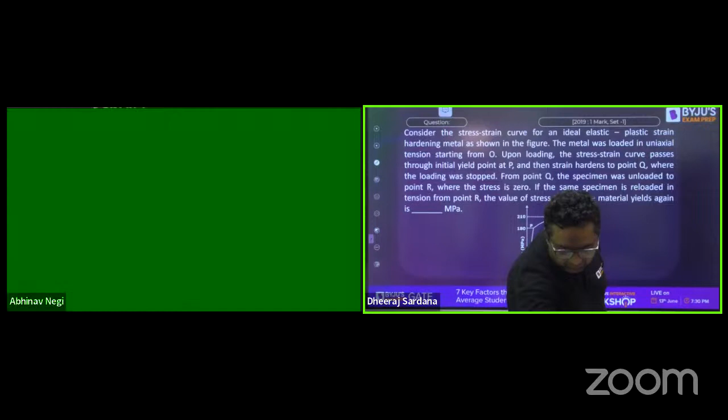Yes guys, so this is the very first question. Consider the stress strain curve for an ideal elastic plastic strain hardening metal as shown in the figure. The metal was loaded in uniaxial tension starting from O. Upon loading, the stress strain curve passes through initial yield point P and then strain hardens till Q, where the loading was stopped. From point Q, the specimen was unloaded to point R, where the stress is 0. If the same specimen is reloaded again in tension, what is the value of stress at which the material will yield again? Please tell me what is the right answer for that.

So here we have loaded the material, then we have unloaded the material. If we are going to once again load the material, what do you think will happen? Will you get the yield strength equal to 180, equal to 210, or somewhere lying between this? Vineet is saying 210. Very good, Vineet. What about others? I want an answer from all of you guys. If you don't have an idea, just give your opinion at least so I can tell you the mistake. Swapnil, Arun, Emmanuel, please tell me what would be the answer. Surya is saying 210. Very good, very good.

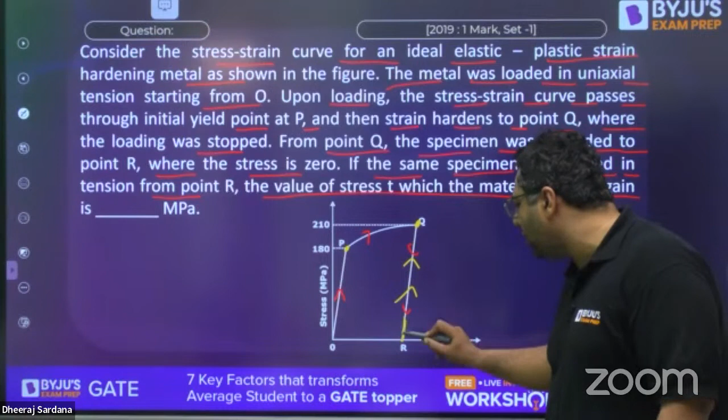So guys, I would like to tell you that whenever we unload and once again load, because of strain hardening, the resistance of the material increases. That is why when you load the material again, the new yield strength will be 210. A similar question in civil engineering we did just 2 days back, about what kind of property changes happen during strain hardening. There we studied that yield strength increases. So now yield strength is not 180 but will become 210, and that practice is majorly done in metal forming. I have taken this question because similar questions have come in exams like ISRO and BARC. So the answer for this is 210. I feel you got it.

Now this is a question where everybody can answer, both mechanical and civil, every student. Harshit, very good. So this question says: a solid cube of side 1 meter is kept at room temperature of 32 degrees Celsius. The coefficient of linear thermal expansion of the cube material is given, and the bulk modulus is given. The cube is constrained all around and heated uniformly to this temperature. Then the magnitude of volumetric stress induced due to heating is to be found. You need to find out the stress.

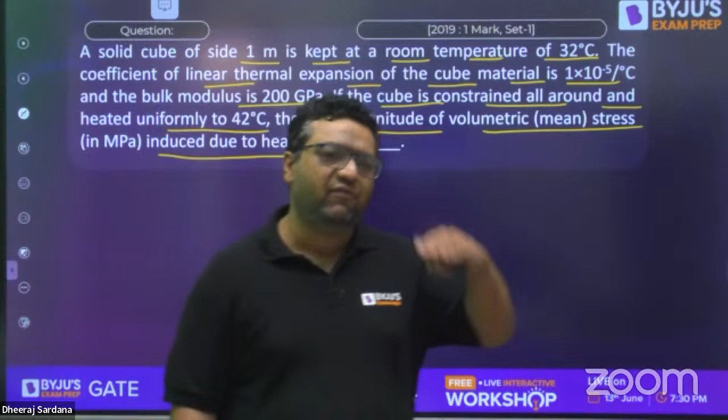No issues, Arun, that's why I already told you. Like you've seen when sir was taking the class, sir also said shear stress problems are not much coming for mechanical, shear flow problems are not coming much for mechanical. Likewise, stress strain diagrams are coming less for civil. So 1 to 2 topics differ, the rest 95% is the same.

Okay, very good Vineet, you have given the right idea, but solve it. So we are having a solid cube like this, and as you know, the temperature is being increased from room temperature of 32 degrees Celsius, with the coefficient of linear thermal expansion alpha mentioned. They are saying the cube is constrained all around, so it develops a volumetric stress sigma. Why volumetric? Because they are all equal - it's similar to a hydrostatic state of stress, sigma compressive. The temperature is increased by 10 degrees Celsius. So the volumetric strain that can come is 3 alpha delta T, and that will be stopped by these sigmas. That will equal 1 minus 2 mu upon E into sigma xx plus sigma yy plus sigma zz, which gives you 3 sigma. So here you just need to find the value of sigma.

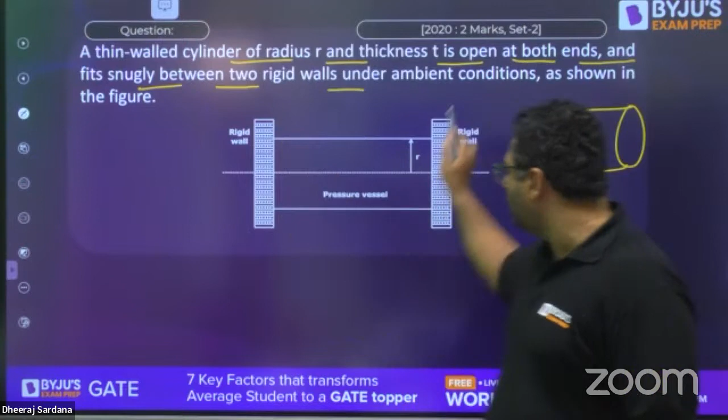Wonderful, so moving further to the next question, guys. This is from thin cylinder. A thin walled cylinder of radius R and thickness T, open at both ends, fits snugly between two rigid walls. So initially the cylinder was open, but then it is surrounded by the rigid walls. Rigid walls are kept, so now both the ends become closed. But as you know, these are rigid walls, they are not going to move further. So you can say ambient condition as shown in the figure. So these are the things mentioned.

The material of the cylinder has Young's modulus E, Poisson ratio mu, coefficient of thermal expansion alpha. What is the minimum rise in the temperature of the cylinder, assuming uniform cylinder temperature with no buckling of the cylinder, required to prevent gas leakage if the cylinder has to store the gas at an internal pressure of P above the atmosphere? You need to find out the value of delta T, my dear.

You know that whenever we are talking about circumferential stress and circumferential strain, it is given as sigma C by E minus mu times sigma L upon E. Then you also know longitudinal strain is sigma L upon E minus mu times sigma C upon E. I am giving you the formula, and you know thermal strain is given by alpha delta T. So you need to use these formulas.

Let us see how many of you are going to give the right answer for this. You know that the longitudinal stresses are going to be 0 because they have already mentioned it is open from both the ends. Rigid walls are there, so they will not create any longitudinal stress, because if the cylinder were closed like this, then only longitudinal stresses would come because of these pressures. So rigid walls will not be creating any longitudinal stresses, so longitudinal stresses you can keep as 0.

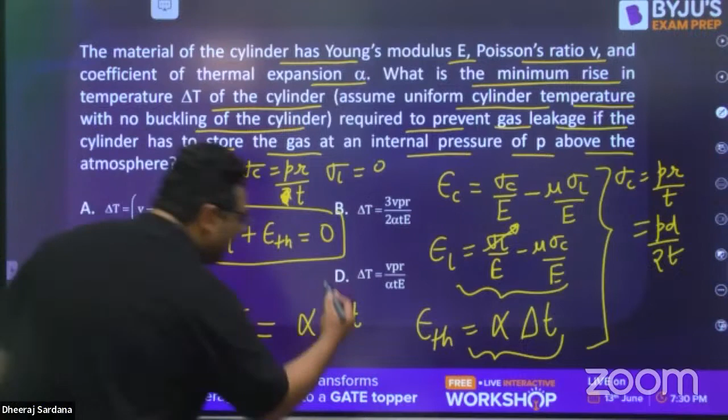So guys, you can feel it, the previous year's questions were not of that level. From last 5 years, a lot of change in the level of the question has been observed. So that is why this series was started. Abhinav sir said that we will be going for last 5 years because they are going to be very dynamic questions, okay, so that's why this idea was generated for you guys.

For that, I will show you one very small example. Let us say we are having this PYQ book of BYJU'S exam prep. So if I am having this body, I am going to apply the load like this. When I apply the load like this, and let us say I'm holding it for some time like this, and when I am going to unload it, after unloading, it is not going to stay there, neither is it coming back fully. It is coming somewhere in between. So whatever is recovered is elastic, whatever has permanent deformation is plastic.

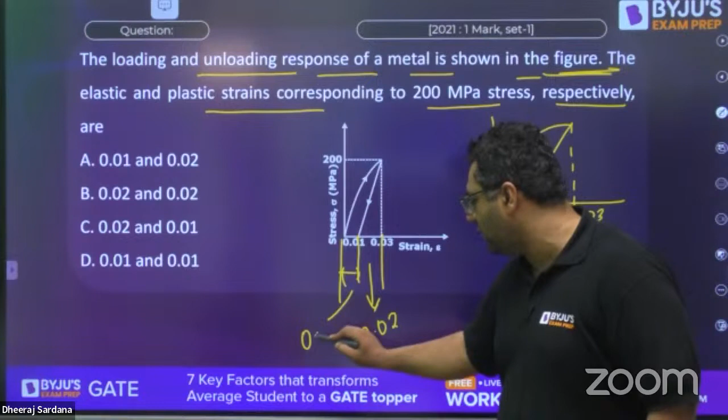Okay, already answered, answers are there. So the answer for this is, you can see this one part is elastic because it recovered 0.02, and this one is plastic because it was not recovered, 0.01. So the answer for this is going to be C.

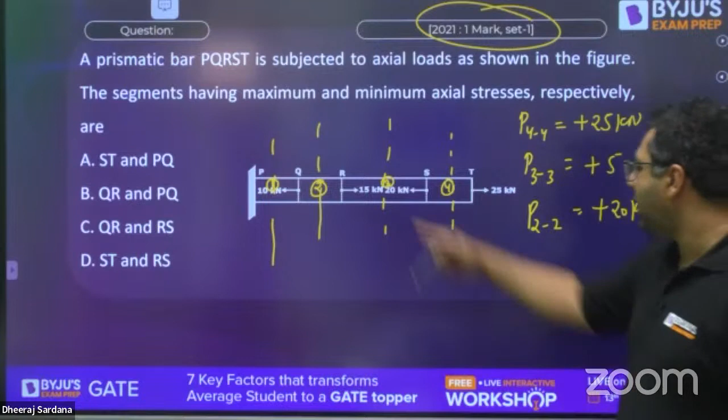So you can see next, minus 10 is added here, P1-1. I am finding out the algebraic sum of all the forces either to the left or to the right hand side of the section, okay. So when you find out, for this section to the right hand side, 25, 20, remains 5. 15 plus 5, 20 minus 10, 10.

So you can see these 4 members. You will find member 4 is having more load, and member 3 is having less load. So this one will be having the maximum stress, and this one will be having the minimum stress. So in that way, the answer is ST and RS, not ST and PQ. ST and RS, D will be the right answer.

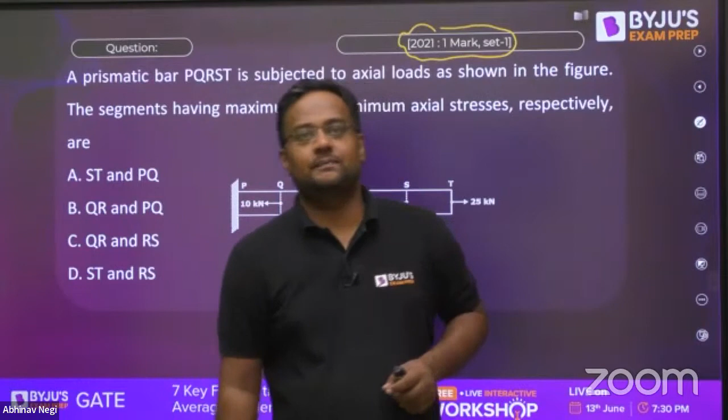Now let's move to the next question. This was asked for 2 marks and it deserves 2 marks. What is here? A right solid circular cone. What is a right solid circular cone? That is symmetric about the y-axis, like this. So this cone is not something like this, that is symmetric in the vertical direction. So this is the cone.

And in this cone, what is happening? Let us see here that height is h, base radius is r. This height is h, this base radius is r. And what is there? The cone is made of material with specific weight W. The unit weight gamma, we generally say that is W. Unit weight is equal to W.

What is given further? Let us see, oh, Suraj sir is also here, the champion, Suraj sir is also here. Welcome, Suraj sir. Okay everybody guys, please welcome, put a heart sign for Suraj sir.

Now modulus of elasticity is E, and deflection due to self weight is asked. Now, unless mentioned in SOM, we consider everything to be weightless. So here it is saying that weight is there, unit weight is given.

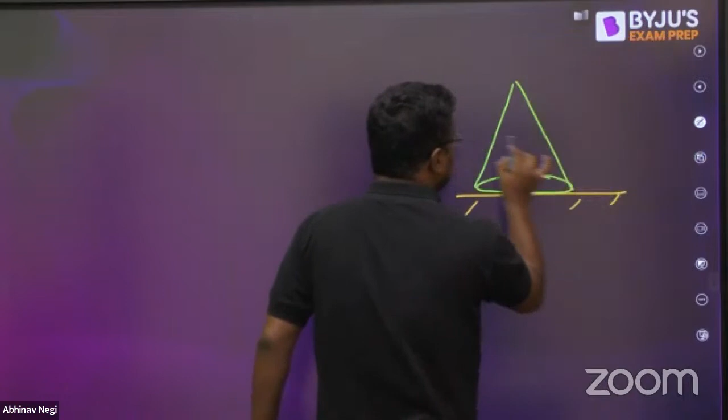Can you please tell me how this is possible? I am saying either see from top and bottom. So from yellow and red, how will it be same? Tell me, please. Let me tell you guys, suppose it is around mid height. This is yellow, and this is red.

So you will be saying red is more. Let me check if anybody has given comments. Mid mein hai isliye. Good morning.

Okay, now why is it the same? Suppose this yellow weight is 3 kg and this red weight is 5 kg. So what will be the reaction? You are not considering reaction 8. So at this section, if you are seeing from top, 3 is coming inside as compression. So from top it is 3 compression.

And at this section, this blue section, if you are seeing from bottom, 5 is going here and 8 is here. So from bottom also it is 3 compression. Give me a beautiful yes or no in the comment box.

I'm saying it is at mid, na, so both are not same. Yellow will be less weight, red will be more weight. So either way, from top and bottom, this is the concept. From top it is less and red is more. So you think like this.

No, from bottom also it will be same because 5 minus 8 is again 3. Give me yes or no in the comment box. Beautiful concept—not just beautiful, but students generally don't think this way.

Okay, now my challenge is still there. I will solve this again. I will ask if there's any doubt, most of you will say no, and then I'll ask a doubt from the steps. You will not be able to answer. I predict this, but if you are able to answer, I'll be more than happy to be wrong.

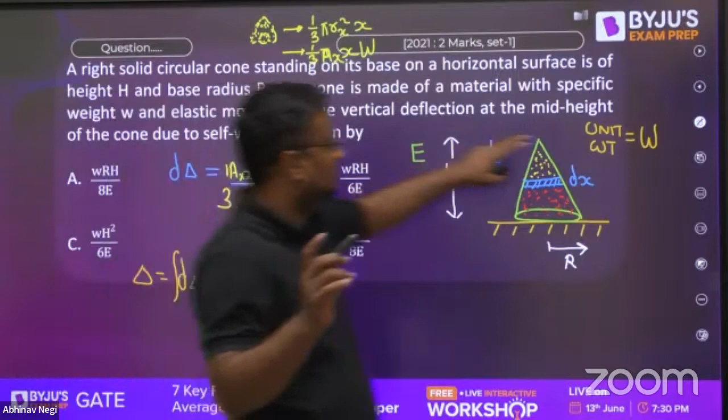Now we want the vertical deflection at mid height. The vertical deflection here at mid height is asked. So at mid height, delta will be the integration of d delta from h by 2 to h, the mid height. From h by 2 to h, it is equal to w by 3E, x square, but 2 is also taken common here, one by two x square. It will be h square minus h square by 4, which is 3h square by 4. So it will be 3 by 8.

3 by 8, please check—some calculation mistake has happened. It will be, no, 1 by 8. Okay, 3 cancels, it will be wh square by 8E. That is option number D.

Now my doubt—are you ready? Everybody please tell me in the comment box. Ready now for my doubt? First of all, give me yes or no. Have you understood this? Any doubt? Give me yes or no.

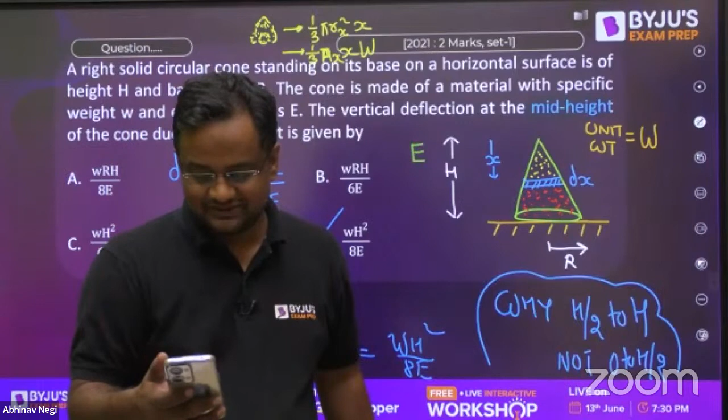So why have we taken from h by 2 to h, not 0 to h by 2? Why h by 2 to h, not 0 to h by 2? Arun, except Arun everybody, I want this because you have not asked it out. This is my doubt.

Now see guys, suppose this is a thing, and this is 0, this is h by 2, this is h. Now whatever is the deformation of this shaded region, is the deformation of this point. Let this be A, let this be B. So delta AB will be equal to delta B, because A is fixed.

Because delta A is 0, A will not be changing. So whatever is the change in AB, that entire change will be in the B portion.

But whatever change is in delta BC, we can't say it's delta B, because BC is also changing. Have you understood now? Whatever the change here, since this top bottom portion from h by 2 to h is not changing, whatever change happens will be reflected at the mid depth, h by 2. But the same cannot be done here, because here the mid depth is also changing, and this is also changing.

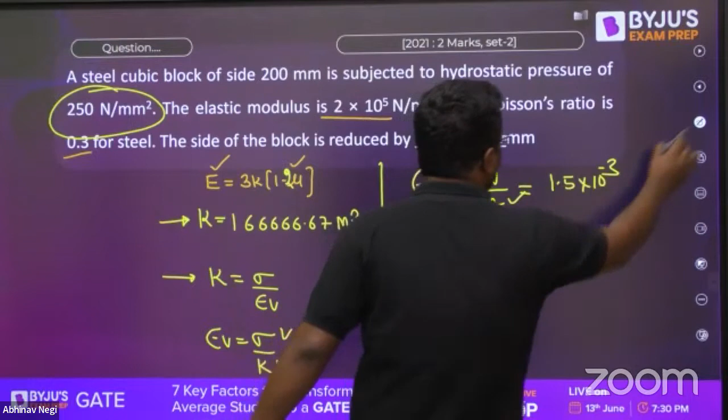Okay, volume is known, volume is known, 200 into 200 into 200. So from here, delta V can be found out because volume is known. So delta V is 12,000.

79,88,000 mm cube. So A will be the cube root of this, so side will be cube root of this. That comes out to be 199.899.

199.899, so they have asked for the change. The side of the block is reduced by, that is 200 minus this. Earlier it was 200, now it is this, so that will be 0.100 mm. That is the answer.

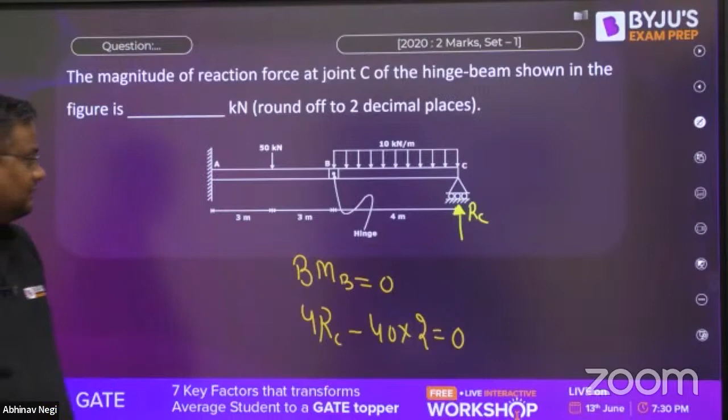Bending moment at B is equal to 0. From the right hand side, it is RC into 4, and one is this 10 into 4, 40 acting at 2. So 40 into 2 is equal to 0. So RC value, 80 by 4, will be equal to 20 kilonewton.

Okay, give me yes or no, any doubt? Now let's go to the bending stress. So in bending stress, what is the question?

Consider an elastic straight beam, and this was of length L is equal to 10 pi. So length is equal to 10 pi. Now this length is made into the form of a circle, bent into a circle. The cross section of this is a square of side 5 mm.

Cross section of this is a square of side 5 mm. Now it is bent in such a way that two ends meet, this end and this end, forming a circle. What is asked is the maximum stress, the maximum tensile bending stress.

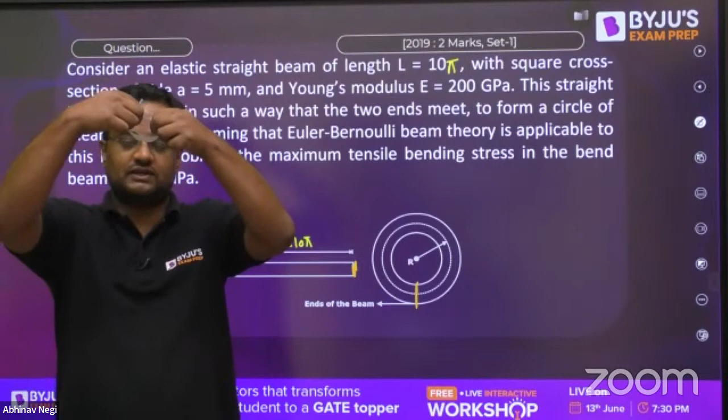Okay, so suppose this is a rectangular plate, length pi. This is bent in the form of a circle. Earlier it was a rectangle, like this, now what will be the radius?

So guys, now the circumference 2 pi r is equal to the length. Circumference is equal to length. So what is the value of r? So pi to pi, r is equal to 5 meter.

Here the moment is not given, so instead of using sigma by y is equal to m by I, we will be using E by R, because other terms are given. Now sigma is equal to E by R. Sigma max will be E by R into Y max.

Now tell me, is R value given? Yes sir, R is given. Is Young's modulus given? Yes, Young's modulus is given. What is Y max? From here, the neutral axis, Y max is equal to 2.5. All values are given, now you can do it in proper units. Y max is known, everything is known.

Y max is 2.5. This is 5 mm, na? Section of side is equal to 5 mm. Okay, so what is the answer coming? Can you please let me know, everybody? 100 megapascal? 100 megapascal, simple answer.

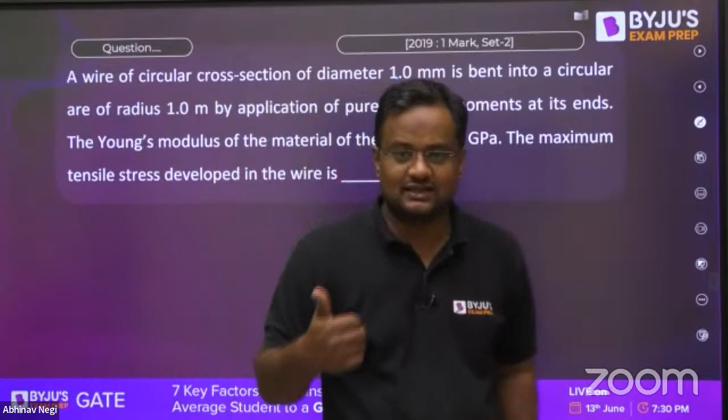Okay, so for the maximum tensile stress, again same concept, sigma by y is equal to m by I, so this is E into y max. E is known. What is the radius?

Radius is this, diameter is this. The red wire I showed you was like this, it has a diameter of 1 mm. So what is y max? Half of this, 0.5 mm. This red wire is bent in the form of a circle whose radius was 1 meter. Now putting y max value as 0.5, E and R are given. So what is the sigma max coming out to be? What is the maximum coming?

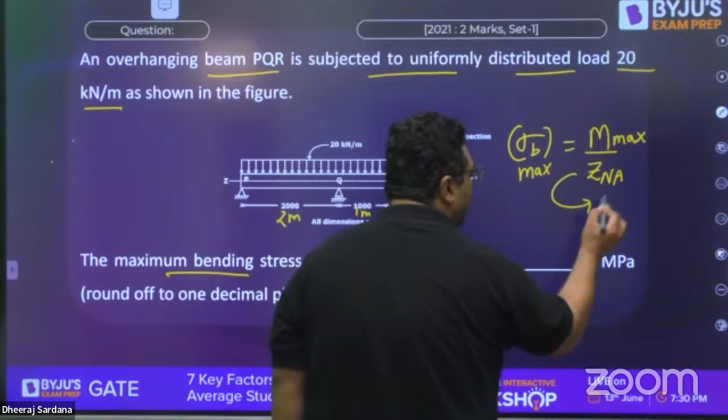I feel everybody is aware that the maximum bending stress is given by M upon Z at NA. But to find the maximum, we need to take the maximum bending moment into consideration. So first, for this given beam, our target is to find the maximum value of bending moment. Once we get that, we can find the bending stress, because Z is BD square by 6. So we just need to find the maximum bending moment for this loading.

So for that, first we take the support reactions here and here - let us say RP and RQ. For that we need to make the equations. First equilibrium equation is summation Fy equals 0, which gives us RP plus RQ equals 20 into 3, that is 60, taking it in kilonewton format. You also try as per the information given. I feel you would be aware how to do that - first you need to find the support reactions.

Then we go for summation moment at Q equals 0, because it is a hinge point, the moment about it is going to be 0. RP is creating a clockwise moment, so RP into 2. This complete UDL can be assumed to act at its centroid, and the centroid of the 3 meter span will be at 0.5 meter from here, creating an anti-clockwise moment. So this is going to be minus 20 into 3 meter distance, and it is at 0.5 from Q. Setting this to 0, you get RP, and putting that value you get RQ.

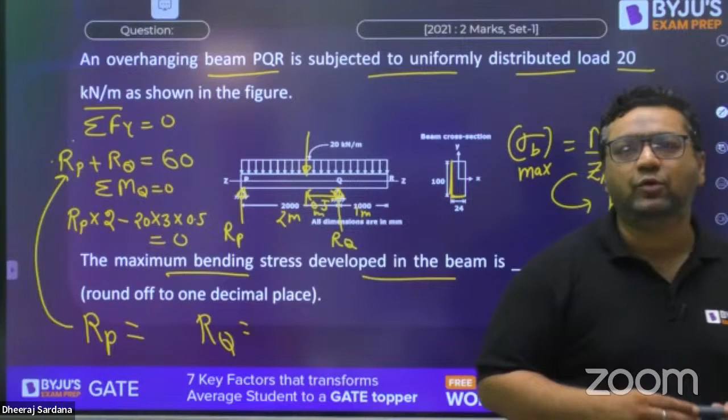Can you give me the value of RP and RQ, then I will go for the further solution? Anubhav, Vijay, Education Hub, Jitin, CAD, Arun, Sumit, Swapnil - wonderful. I feel aspirant is not there now. RP is coming out to be 15 kilonewton. RQ is going to be 45 kilonewton.

Yes, 15 and 45. Very good, all of you! So 15 kilonewton and 45 kilonewton are the values of RP and RQ. Very good, Surya, wonderful dear. When the total load's centroid comes nearer to Q, more reaction will come at Q, that is for sure. Now I am showing you this as RP, this as RQ, and this was the UDL.

This is the case. Now we need to find out the maximum bending moment. First, we will take a section XX at a distance of X. When writing the bending moment equation MXX, you will write RP into X creating clockwise to the left hand side, and UDL will create anti-clockwise, so minus W into X into X by 2. W into X is load, X by 2 is the centroid distance.

So RP value you have calculated as 15, so it is 15X. Minus W, which is 20, into X square by 2. The 2 will cancel out, and you will get the equation to be 15X minus 10X square. Now if you want to find out where the bending moment is going to be maximum, take x from here.

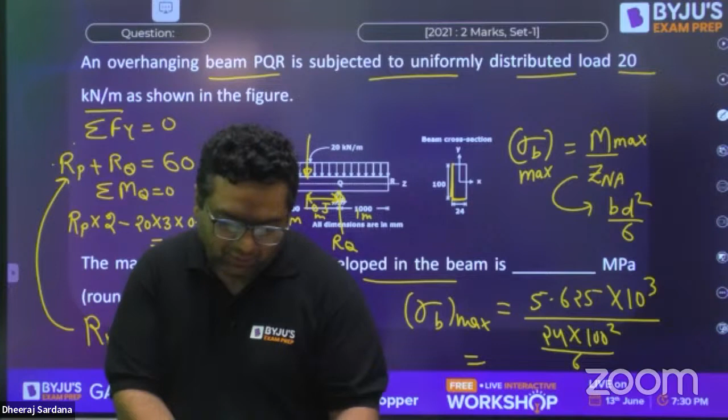I feel you guys are enjoying the session the way sir was explaining the cone problem. You will not get that kind of solution, that kind of explanation at any other place. The way of explanation will give you confidence for similar questions as well. We are not only here to make you mug up the last 5 years' question solutions, but to prepare you for similar questions. That idea, once I had, I was very happy when sir said it too — yes, last 5 years' questions would be very beneficial for students. And so is your response, guys.

Wonderful. So the answer will be coming as 140.6 MPa. This is 10 to the power 3, coming into Newton per mm square.

140.6, are we getting? Yes, okay, 0.14 we are getting. 0.14, I have not calculated that, I calculated only till this point. I thought after that we can do it. So it is 5625 into this, divided by this. So I feel yes, 0.140 would be coming. But it's fine, I feel you can do that much. That's great, moving to the next question guys.

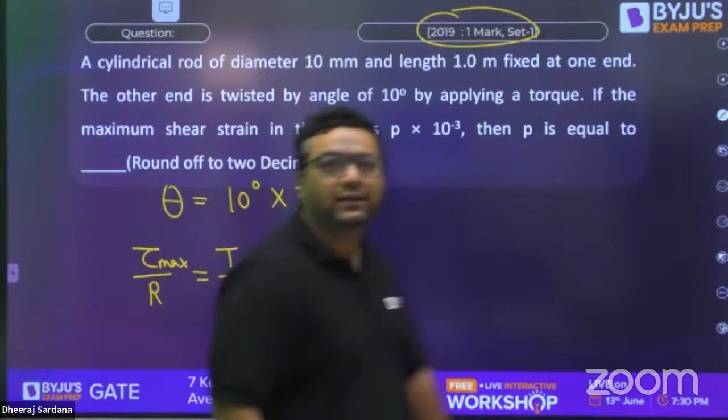Okay, sorry, yes, that was the mistake actually. It will come out to be 10 to the power 6 because it is Newton meter. So we have converted into Newton mm. Very good, Anubhav, you have found out the mistake I have done. It is 10 to the power 6 because Newton meter was the unit. So I converted first kilonewton into Newton, then meter into mm. So when you go for these two transitions, 10 to the power 6 will come, and then this answer is correct.

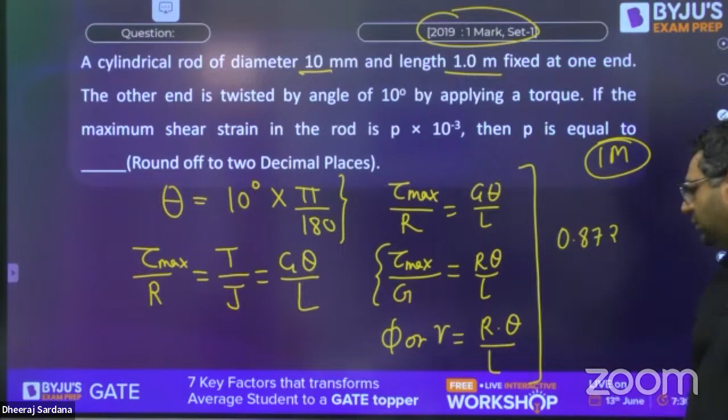Yes, Arun, Vijaya, Anubhav. Okay, Surya has given the answer 0.87, that is correct. 0.872 is correct, because when you equate it with P into 10 to the power minus 3, P will come out to be this. Surya, very good dear, you are doing very nicely. Wonderful. Anubhav, Arun, everyone.

Have you done it guys? Please tell me that. Very good, Swapnil. Wonderful, Swapnil. Very good. Moving to the next question, guys.

Now we are entering into the deflection part, deflection of beams. Deflection of beams is coming more for civil people. For civil, 1 to 2 questions are compulsorily coming from that topic. But from mechanical, either SFD-BMD or deflection, 1 question is coming from both. So in mechanical, equal weightage is given to all topics: simple stresses 1 question, bending torsion 1 question, SFD-BMD deflection 1 question, strain energy 1 question, thin pressure vessel column 1 question. So equal weightage is there and more weightage is there. 8 to 10 marks is coming for SOM.

So a cantilever beam having a square cross section of side A is subjected to an end load. If A is increased by 19%, the tip deflection decreases approximately by how much. You already know if we have a cantilever beam like this, and we apply a load P like this, the deflection coming out to be PL cube upon 3EI. So deflection is directly proportional to 1 upon I, and I will be nothing but A to the power 4 by 12. So that is the case. So you are told that 19% is the increase of A, then by how much percent will deflection get reduced?

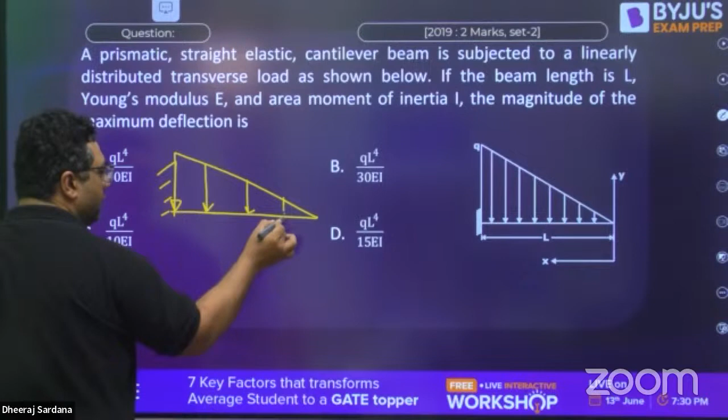So my dear, what you need to do, you need to find out the magnitude of maximum deflection. I feel everybody would be remembering this because in the table, we remember the result. For this case, if you will be finding out the deflection at A, you will be getting minus WL4 upon what? Everybody remember that. Very good, Surya, 30 EI. And when you will find out the theta A for that, it will be WL cube upon 24 EI.

Don't worry, I am going to show you the solution as well if you want. Don't worry for that. So we are having this. Everybody remember that we always remember this table so that we can very easily do that. So if this is A, this is B, you are going to write down equation at section XX.

So you write the equation at section XX as EI d square y by dx square is equals to Mxx. Mxx is nothing but, you can see, this is the section, triangle is the load. So we can assume the area of triangle acting at centroid. So if this distance is x, we will be having Wx by L acting at x by 3. Everybody know that? Because if you take this triangle, total load is W here, maximum, so here will be Wx by L.

So you can write it as moment is this into this. So this is going to create hogging, minus Wx by L half into x. This is the area acting at centroid x by 3. So when you will be going for the integration once, you will get dy by dx EI. First integration, you will go for minus 1 by 6 Wx cube by L dx.

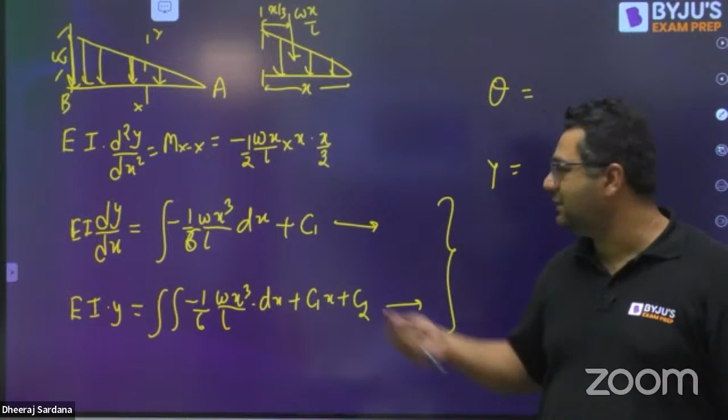If anybody wants, I will go for the complete solution. Otherwise, I know you have remembered the table. So if they ask you about UDL in a similar way, you would remember the deflection formula.

So now this question, which I was saying was asked in civil and XE many times, came for the first time in mechanical in 2019. Likewise, I can show you many questions repeated from XE and mechanical in civil as well. So sir, am I right?

Bilkul sir, you are always right. So this question, sir, you have done, na? Okay, now I will be doing this one, guys. Let us draw the free body diagram now.

Whenever spring questions come, you have to do this almost every time. This P load wants to push this beam downward like this, but the spring will provide the upward reaction. Let the upward reaction be R, and if the upward reaction is R, then the spring will have the R reaction downward. I already told you yesterday what I follow to make the free body diagram.

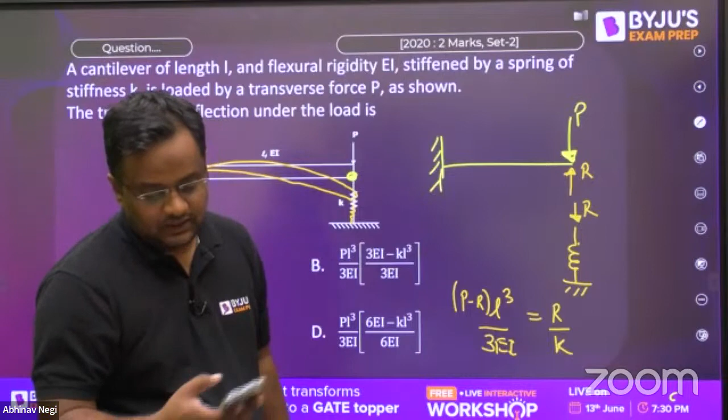And deflection of this point is R by K. Both will be same, both will be same. From here, you can find out the value of R in terms of P.

Now let me check how much it came when we found R in terms of P. This is coming to be R into (1 by K plus L cube by 3EI) is equal to P L cube.

Okay guys, whatever value R comes to, leave that, you can do it from here. Then deflection will be, whether you put it here or here, anywhere, deflection will be R by K. Either way you put it, both are equal, it will be same. So from here, you will get option C. Have you understood the concept?

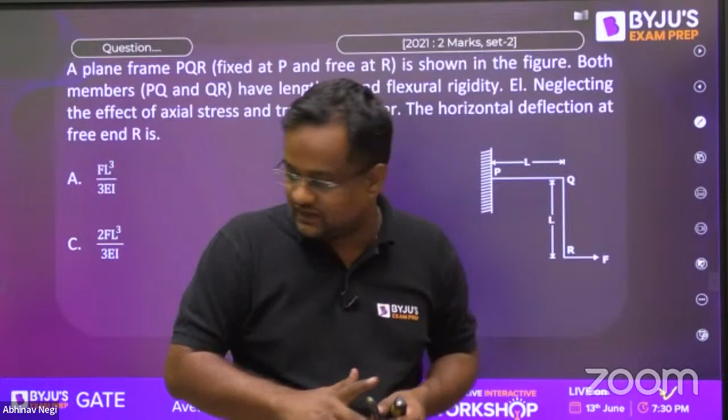I only know how to make a free body diagram. This is the orange and this is the yellow. Now here the F force is coming. Let this F force be Pn.

Okay, so here is how much? Pn for balancing. And what is the moment? This length is L, so it is applying Pn into L here.

Internal force is always equal in magnitude, opposite in direction, so that Pn will go here, Pn, and here Pn clockwise. So here, this is rotating it clockwise. So here it is anti-clockwise.

So here this F value will be... no, this is anti-clockwise there. So here it is rotating it like this. So this is clockwise, so internal force equal and opposite. So this is here in this direction, so this will be opposite, this will be Pn into L like this.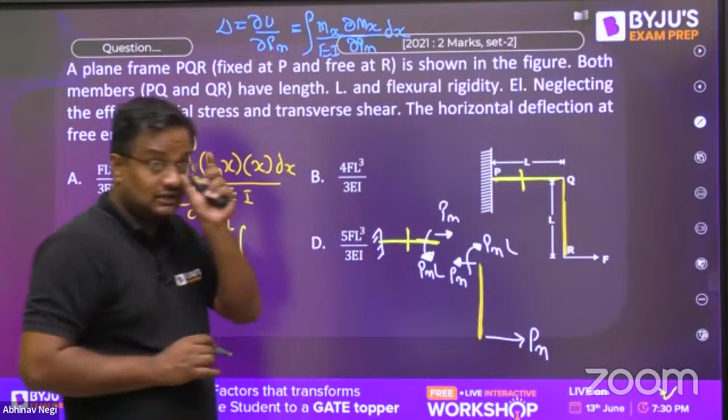Now for this yellow part, plus, this yellow part is again from 0 to L. At any section, what is the bending moment? This Pm is not applying any bending moment. The bending moment is due to Pm into L.

Whatever is written here, differentiate with respect to Pm: L dx upon EI. Now this step is done. We can write the original values, that is Pm is equal to F. So this is equal to, everybody please see here, Pm is equal to F. Now we can put the original values.

This is F, this is F by EI, and this will be x square by 2. So put 2 here. X square integration will be L square. So FL square by 2EI, this orange term.

Now for the yellow term, this is Pm is equal to FL square by EI, integration of dx from 0 to L will be L. So this will be FL cube.

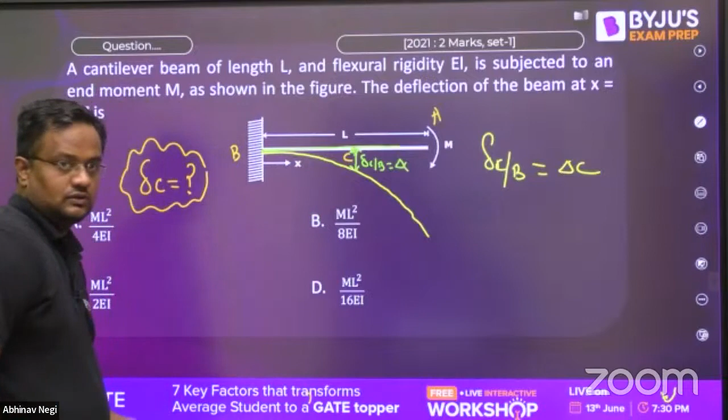Now here, deflection of C with respect to tangent at B is equal to delta C. It is actually the area of the M by EI diagram. So this is the M by EI diagram, the area of M by EI diagram between B and C about C. So what is the area? M by EI into L by 2.

The moment arm is L by 4 about C. Moment of area into distance, this is area, this is distance. So this will be ML square by 8EI.

Okay, again easy, again easy. So deflection question, civil might be finding easy here.

Now consider a linear rectangular thin sheet of metal subjected to uniform uniaxial stress of 100 megapascal. So guys, uniaxial means only in one direction. So this will be sigma 1 major. Shear stress is 0, nothing shear stress here. Uniaxial loading only, one direction, one loading, no shear. So what is sigma 2? 0. Simple. Now plane stress condition means sigma 3 you don't have to consider.

Young's modulus is given, Poisson ratio is given, the principal strain is asked. So everybody can tell this: epsilon 1 equals sigma 1 by E minus mu sigma 2 by E, with mu given and sigma 2 is 0 because it is unidirectional loading. Epsilon 2 is equal to sigma 2 by E minus mu sigma 1 by E. Everything is given, so the answer will be option D.

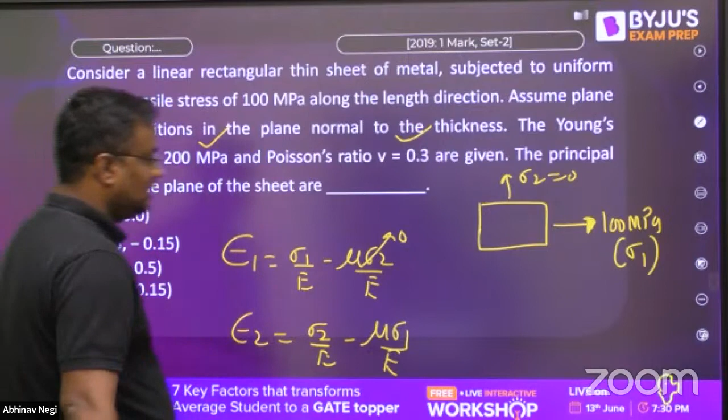It will be the D option. Getting it or not? Getting it or not?

Okay, now Dheeraj sir will be coming with his question and then I'll be coming again. So these questions we have done. This time in the second shift, it seems I went a bit fast, I feel.

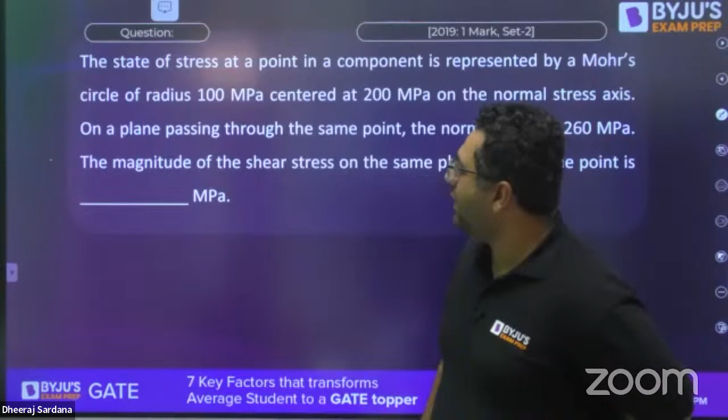So guys, now we have a question from transformation or principal stresses. The state of stress at a point in a component is represented by a Mohr circle of radius 100 MPa, centered at 200 MPa. So take the axis, let this be the center at 200 MPa, and you have a circle with 100 MPa radius. This is the Mohr circle. They say the normal stress on a plane passing through the same point is 260. So 260 would be somewhere here, because here it is 300. So we are talking about this point, so this distance is going to be 260. This was a new type of question asked for the first time in GATE 2019, for 1 mark.

And the magnitude of shear stress on the same plane, that's what they are asking. So for that, it's better if we make the radius. You already know the radius is 100. This is 100, and if this is 200, this is 60. Now everyone can apply Pythagoras to find this tau value. You can write 100 squared equals 60 squared plus tau squared. Very easy question, very very easy question.

Shri Ram, Meena, good afternoon dear. How are you? So Anubhav, Arun, Shri Ram, aspirant, solve it. Aspirant, where were you in between? In between you went, I feel. Okay, Anubhav is saying 80, Arun is saying 80, and I have already calculated the answer for you. The answer is 80, very good. Wonderful guys, very nice.

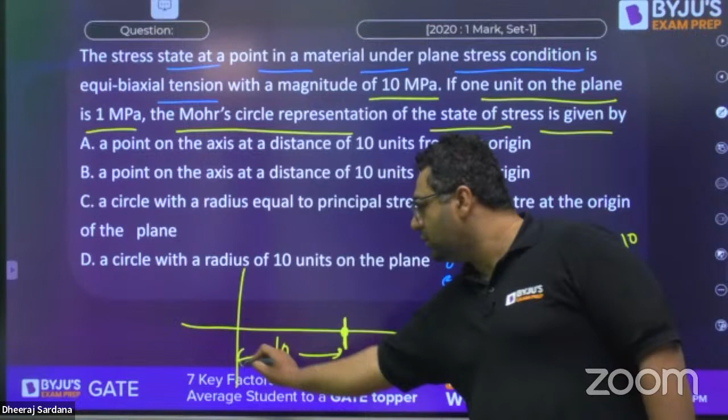When you talk about Mohr circle, this time it's going to be a point because X phase state of stress is sigma comma 0, and Y phase state of stress is sigma comma 0. They are the same points. So when you join them, you get a Mohr circle as a point at a distance of 10. Shear stress will be 0, all planes are principal planes. So the answer is going to be B.

B is the right answer. Anubhav is saying A is a point on the axis at a distance of 10 units from origin. Actually they have written the same, so that's why A and B are the same statement here. This is by misprint. I feel this should be 1 unit, then A is wrong. This was the misprinting - A was having 1 unit, B was having 10 units, that is the difference. C is saying radius equal to principal stress, not possible, and radius 10 units, not possible. That is how the thing works.

Yes Arun, so this is the problem, as sometimes typists also make mistakes. This was a dangerous question, if you see.

Consider 2 concentric circular cylinders of different materials M and N. You can see this is M, this is N. They both have center at C or O, let us say. Then they are saying they are in contact with each other at R equals B. So at this radius, this is the contact point of both cylinders. Then they say the interface at R equals B is frictionless, meaning at this surface there is no friction, and no friction means no relative motion.

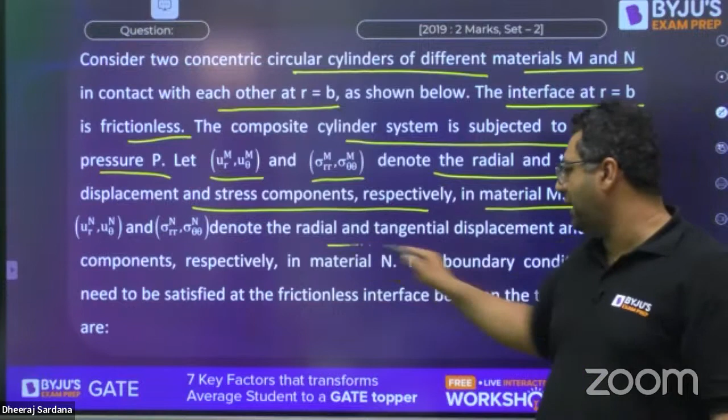Then they say the composite cylinder system is subjected to internal pressure P. UR, U theta, and sigma R, sigma theta denote the radial and tangential displacement and stress components in material M. Similarly for N, the boundary conditions that need to be satisfied at the frictionless interface.

This is a difficult or different type of question, I will say, and first time it was asked like that. But if you go for the solution, it's not very difficult - looking at the statement it seems difficult. First of all, this is frictionless, so there's no relative motion.

So you must say that the radial velocity of M and radial velocity of N will be equal. But when talking about circumferential velocity, for any cylinder surface, you know this is the radial direction and this is the circumferential direction. Whenever we talk about circumferential velocity, it is given as R into omega. So when talking about M and N cylinders, the radius will be different, so velocities will be different. That's why circumferential velocities will not be equal.

So circumferential velocities are not equal, but radial velocities are equal. For this case, if you see radial velocities given equal here, and circumferential given equal there, B is wrong. If you see radial and circumferential both given equal, A is wrong. So either C or D can be the answer.

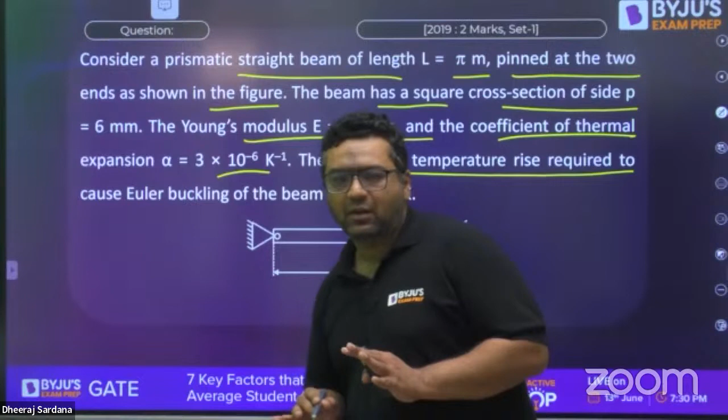I feel here two things are there. First of all, temperature is going to rise. When temperature rises, the beam will try to expand. At that time, a reaction will come, and as the reaction comes out to be compressive in nature, it will be a case of Euler's buckling.

Arun, that is of thick cylinder. Yes, thick only. I was showing you the direction because in thin cylinders, radial stresses are assumed to be zero. That is sure, it is thick.

So here, what we are going to do is say the force due to thermal. I feel everybody knows that this is A, E, alpha, T - this is the force due to thermal. And whenever we are talking about this force, buckling load is pi square EI upon Le square.

So this is going to be compressive, and this is going to be tensile because temperature increases. Now, the minimum temperature rise required to cause Euler's buckling - if the body is in equilibrium, both will be equal.

It's a very good question. For the first time they have included thermal stresses with the column. Otherwise, thermal stresses were included with beams only, bars only, shafts only. They have included it with columns also.

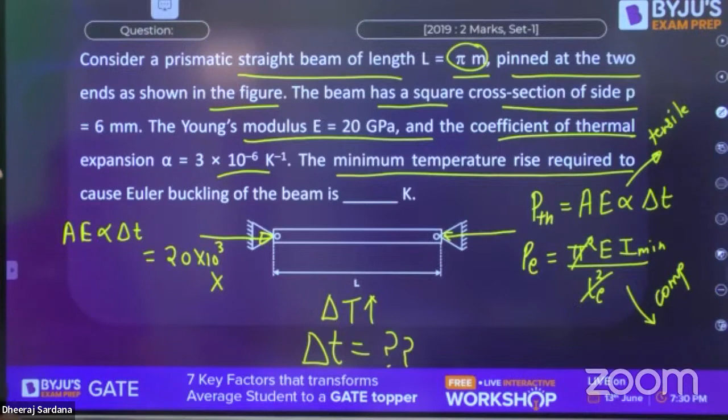I minimum, it is a square section of side 6 mm. So side P equals 6 mm, so I is 6 to the power 4 by 12. And you know that area is A square. Young's modulus will also get cancelled out, no need to put the value. This is 6 ka square. Alpha is also given as 3 into 10 to the power minus 6. So you will get delta T equals to...

Everyone, I don't feel that answer is correct, Anubhav. Please try it again, it is a very easy question. This is 6 ki power 4, this is 6 ki power 2, so it will be 36. So when you cancel out this 12, 3 will get cancelled out. I feel the answer will be coming out to be 1 Kelvin.

1 Kelvin is going to be the right answer. When we are talking about the values, this is going to be in mm square. So as everything is given in meters, you would be having 6 to the power 4, and this will be having into 10 to the power minus 6. Why? Because this is 6 to the power square, this is 6 to the power 4.

This is 6 to the power 4. So either you can put 10 to the power minus 12, 10 to the power minus 6 - they will also get cancelled out. So this will be cancelling by this. So the answer is 1 Kelvin.

Arun, got it, your mistake? Yes, definitely, because everything is in meter. You won't get the answer in Kelvin directly - this is only Kelvin inverse. So every other thing we have converted into meters. So it should be like that.

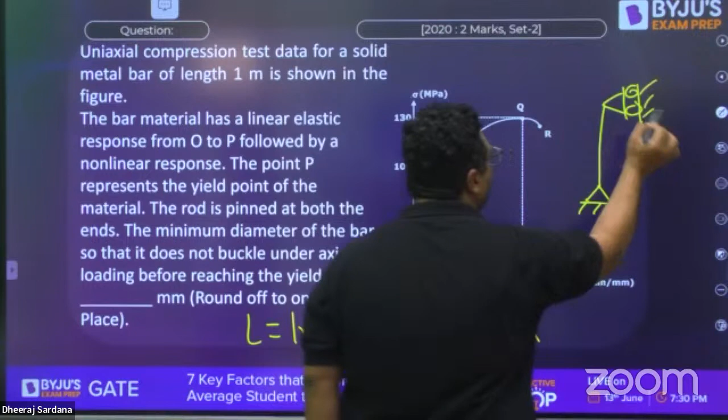Okay, that is mentioned. Now he's saying, the point P represents the yield point. The rod is pinned at both ends - that means it is a case of both end hinge column problem. Then he is saying that it does not buckle under axial loading before reaching the yield point. For that, you need to tell the minimum diameter, my dear. Yes, very good, guys.

So you are going to apply the force, and he is saying that buckling should not happen. For that, what should be the diameter? You just need to know that buckling load is pi square EI upon L square. If you do PE by area and equate it with SYT, I feel you will get the answer of diameter. So just do this.

This is a very easy question. From the figure it looks very difficult, and from the statement you may feel it's tough, but if you see, it is very simple. You just need to equate load by area equal to stress, and you will be getting the diameter. This is the question, so guys just solve it.

Now we have done a lot of questions. Very few questions are left for our side. Yes, solve it. I have already done it for you. Let us see how many of you give the right answer.

So PE by A is SYT. PE ka formula is there in front of you, and we need the value of diameter. Very easy question. Everybody try it.

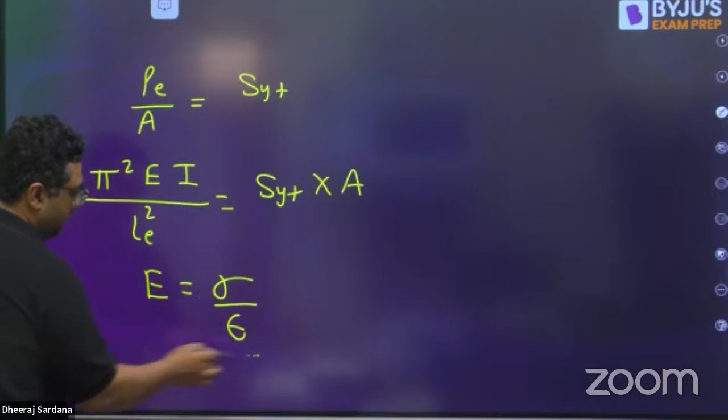So when we are solving this, according to my data, the answer is coming out to be D minimum as 56.94 mm. Are we getting that? Swapnil, Arun, Anubhav, please tell me that. Yes, 56.94, that is the correct answer.

If you want, I am telling you how to find out Young's modulus. Young's modulus is the slope, you can find out. This is the hint I feel you are looking for.

Anubhav, the answer will be coming 56.94. I feel you have made a small mistake because you are getting half of that. So this is the stress, this is the strain. This will give you Young's modulus as 100 divided by 0.002. Stress by strain is Young's modulus. Everyone got it or not?

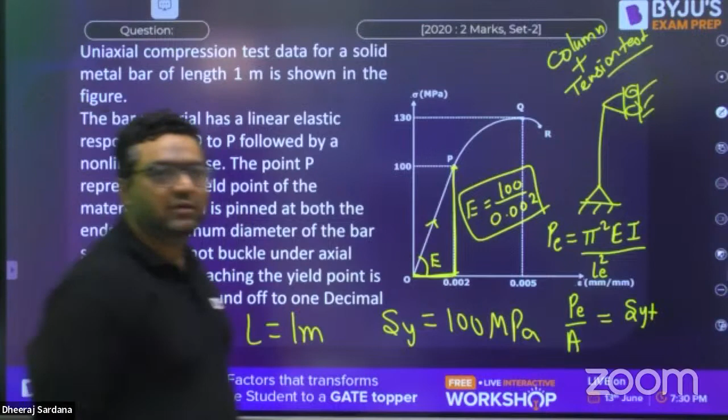Shall we move on now? This is simple calculation, I feel you can do this. Okay, next question. Yes, Abhinav sir would be taking the next question. Please tell me, is it clear for you? Tell me. Yes, sir.

Okay, till sir joins us, let us solve one or two more questions. Let us see this question. Okay, let us see how many of you give the right answer for this.

Okay, sir is coming. I was on mute, that's why. Okay sir, then you take your question, then I'll come back. Okay sir, okay.

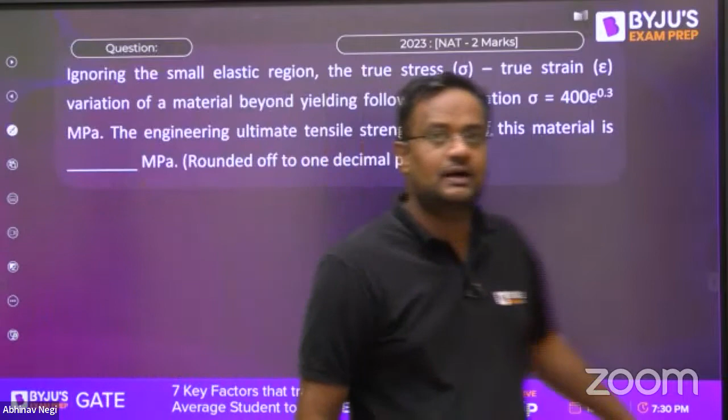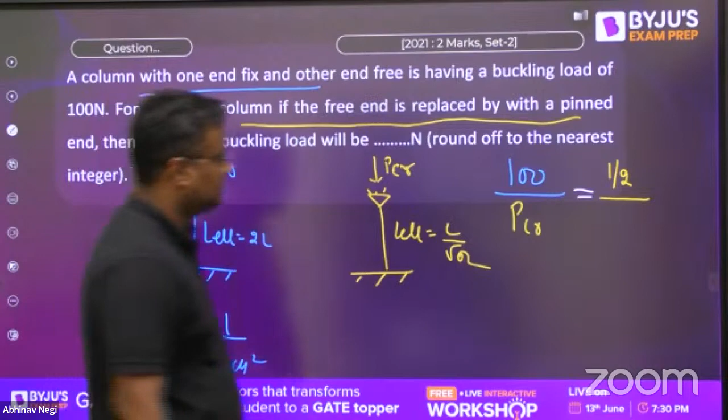So from here, the PCR 1 by 8 is equal to 800 Newton. Answer is equal to 800. Have you got it?

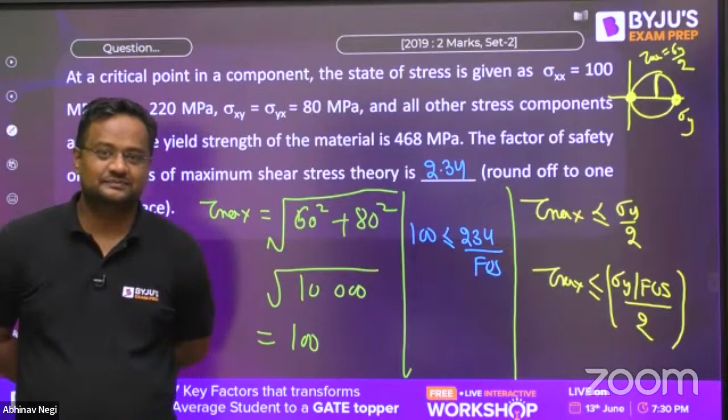You hadn't sent the solution for this, sir, show me. Sir, actually, I thought it is theory of failure. So, theory of failure for civil gate, it doesn't come, right? 1.8 is correct. 1.8 it will come, I feel.

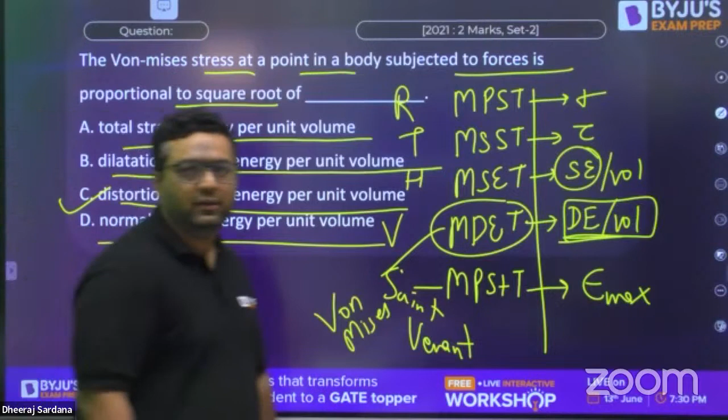The last theory is maximum principal strain theory. It takes criteria to be maximum value of strain. This was given by Rankine, this was given by Tresca, given by Haigh, given by von Mises, given by Saint-Venant. Don't worry, this is a very small chart on one page where all theories of failure can be remembered. I will try to add that slide here so that civil people can also get an idea. Otherwise there is no requirement for civil. For mechanical, it is core and in depth.

Moving further, once again UTM. This is also from testing of materials. So this topic is also not mentioned in the civil engineering syllabus. This is from testing of materials, but you can do it easily because it is a very simple question.

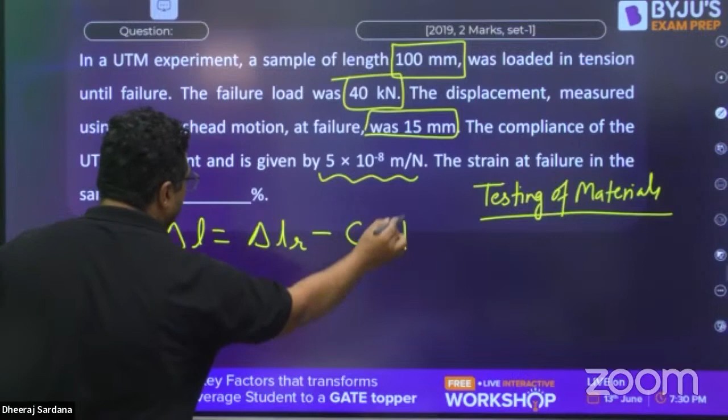Just solve it, I am looking for your answers. Compliance is given to us. So delta L is delta L reading minus C into P. And you need to find out this, and after getting this, strain is delta L by L. You need to give the answer in percentage. C is compliance. This is the formula. Question from tension test.

So they have already mentioned 15 mm, 40 kilonewton, length is 100 mm. So compliance you already know: delta LR is 15 mm minus compliance is 5 into 10 to the power minus 8, this can also be 10 to the power minus 3 because it is in mm, into P load 40 kilonewton, 10 to the power 3. Whatever you get here, divided by length, that will be your answer, and get the answer in terms of percentage. Solve it everyone, and we are about to complete.

Very few questions are left now. This is from 2019 for 2 marks. Now we are only left with the questions of GATE 2022, all others are covered, everybody. So when you find delta L dividing by length, you will get the value of strain. So delta L is coming out to 0.013 meter.

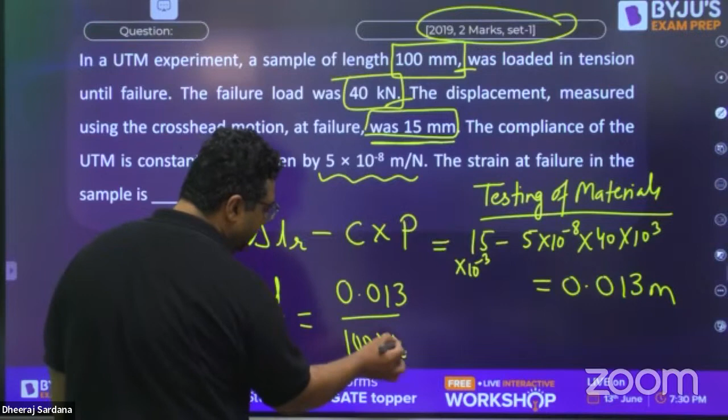0.013 meters divided by 100 mm. So 100 into 10 to the power minus 3. So when you find this out, the strain value will be coming out to be 13% after multiplying it with 100.

13% will be the answer. Okay, 13% will be the answer.

Shri Ram Meena, for that I feel Abhinav sir would be able to answer properly. So sir's questions are also coming because RCC and... Yes, very good Arun, your answer is correct.

But when you will find out in terms of percentage, we need to multiply it with 100. Okay, yes.

So now Abhinav sir would be discussing the question as well as the points Sriram you are asking, because RCC and steel are part of civil engineering. Okay, so I feel sir is coming. Till then, let us solve one more question, one more question from my side before sir joins us.

Assuming the material considered in each statement is homogeneous, isotropic, linear elastic, and the deformations are in the elastic range, which one or more of the following statements is true? A body subjected to hydrostatic pressure has no shear stress. If a long solid steel rod is subjected to tensile load, then its volume increases. Maximum shear stress theory is suitable for failure analysis of brittle material. If a portion of a beam has zero shear force, then the corresponding portion of the elastic curve of the beam is always straight.

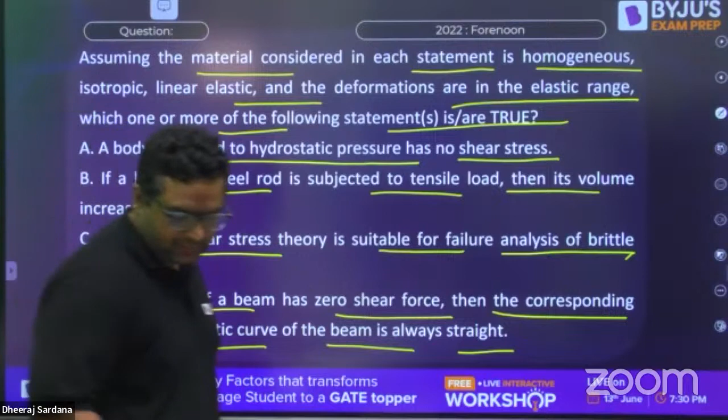That is correct, Arun, 13% will come. Yes, when you go for percentage, multiply by 100 will give you 13%.

What will be the answer for this? If you see the very first statement, a body subjected to hydrostatic pressure, that means this is a state of stress, compressive. For this case, we have Mohr circle as a point. When Mohr circle is a point, the radius of Mohr circle is 0. When radius of Mohr circle is 0, it means shear stress is 0. So option A is correct.

And the second option says if a long solid body is subjected to tensile forces, then length is going to increase, area is going to decrease. Generally the longitudinal strain is going to be more than the lateral strain, because lateral strain is mu times of longitudinal. Because of that, when you find out the total volumetric strain, it is going to be positive. It means yes, volume increases. This is MSQ, A and B are going to be correct.

Maximum shear stress theory is applicable for ductile material, that is why this option is wrong. If a portion of beam has zero shear force, then the corresponding portion of the elastic curve is always straight - that is not correct, because if bending moment is constant, then we will have a circular arc. So that option is also not correct.

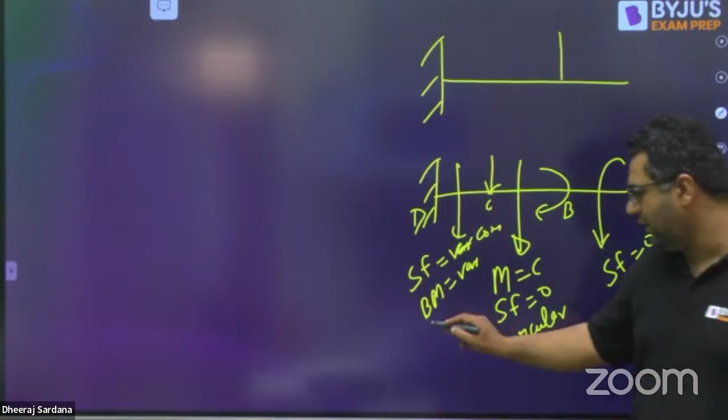Is it clear for everyone? Okay, I feel Arun is trying to answer. Shri Ram Meena. Okay, fine guys.

So this is the case, and this is coming by this: M upon EI is equals to 1 upon R. So when bending moment will be 0, R will be infinity, straight line. When bending moment will be constant, R will be constant. When bending moment will be variable, R will be variable. Okay, this is how the things are coming.

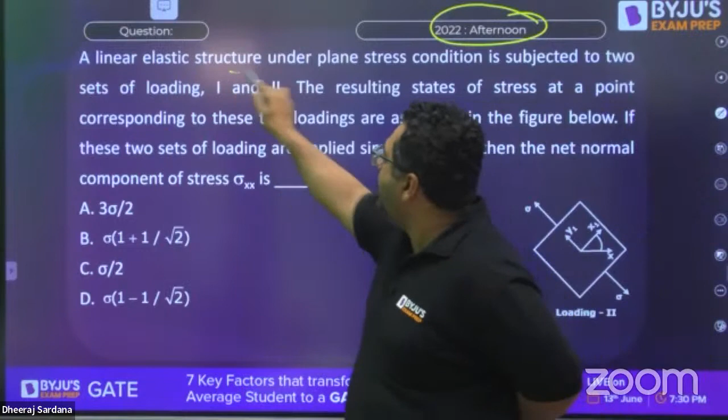This is from GATE 2022 afternoon session. A linear elastic structure under plane stress condition is subjected to two sets of loading, 1 and 2. This is uniaxial loading, and this one more loading is acting, but this is inclined by 45 degrees from the x-axis. The resulting state of stress at a point corresponding to these two loadings are as shown in the figure below. These two sets of loading are applied simultaneously. Then the net normal component of stress sigma xx is - these two loadings are applied on a component, and you need to find out the net sigma.

The net normal stress - obviously it is going to be, let us say this is 1, this is 2. So this is going to be the effect of sigma for 1 plus effect of sigma for 2. The effect of sigma in x direction is simply sigma. You need to find out this component, and then you will be able to answer. Angle given is 45 degrees. Try to solve this.

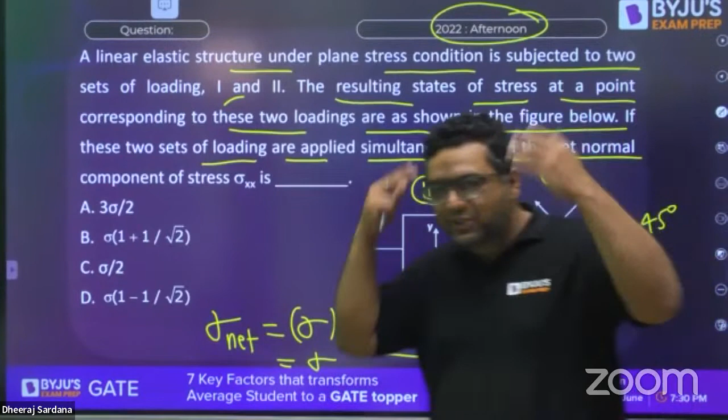No issues there, but that hard work of yours will pay you at the end. Because you will be habitual of sitting 3 hours, which is the major challenge for GATE students. At that time, many students get tired in 1.5 hours. After that, they are just completing the paper without that much intensity required. So these type of sessions will also give you a sitting time of 2.5 to 3 hours, which will make you prepare for that. Because your mind shall run for all the 3 hours, that is required.

From x-axis, this is making an angle of 45 degrees. If you want to find out the normal component for this, you can apply the formula: sigma xx plus sigma yy by 2, plus sigma xx minus sigma yy by 2, cos 2 theta, plus tau xy sin 2 theta. Is it clear? For this loading, sigma xx is sigma, sigma yy is 0, tau xy is 0. Put these values here, put theta equals 45 degrees, and you will get the value of sigma theta at theta equals 45. Then you just need to add this component here and get the answer.

Anubhav is saying the answer is B. What about others? You must be aware that tau xy is 0, so this will get cancelled out. If you have any doubt, I am showing you. Because of this, the normal stress will simply be sigma.

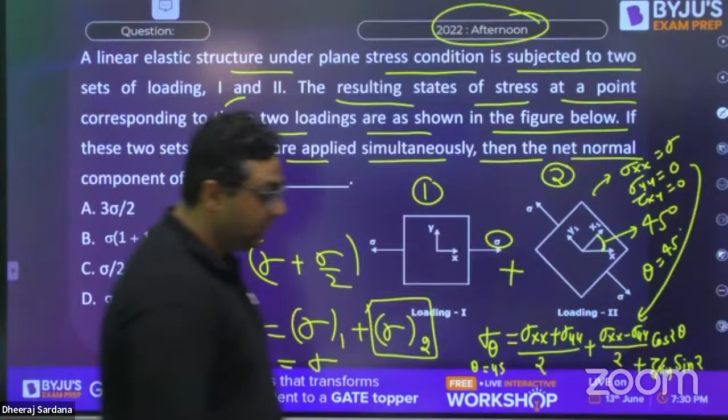Theta is 45 degrees, but 2 theta is 90 degrees. Cos 90 is 0, so the answer for this will be 3 sigma by 2, and 3 sigma by 2 is option A. So guys, with this, we have completed this.

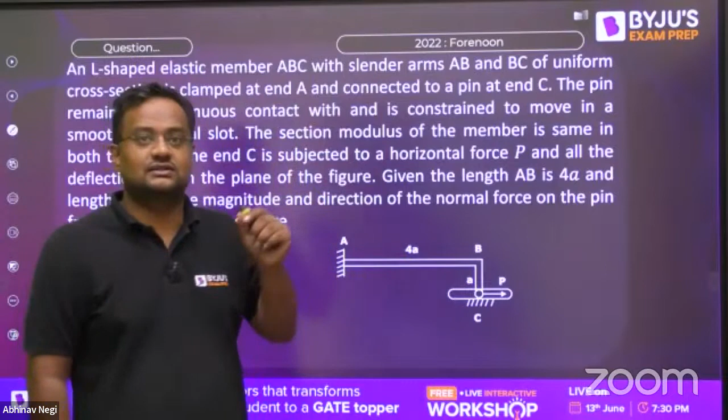Okay, got it? Now an L-shaped member is there, this one, and force P is acted on this pin. The condition is that it can only move horizontal. It has a constraint, we are restricting it to move only in horizontal. Now a horizontal force P is applied. Given the length of the beam AB is 4A, and this is A, what we have to find out?

We have to find out the magnitude and direction of the normal force on the pin from the slot.

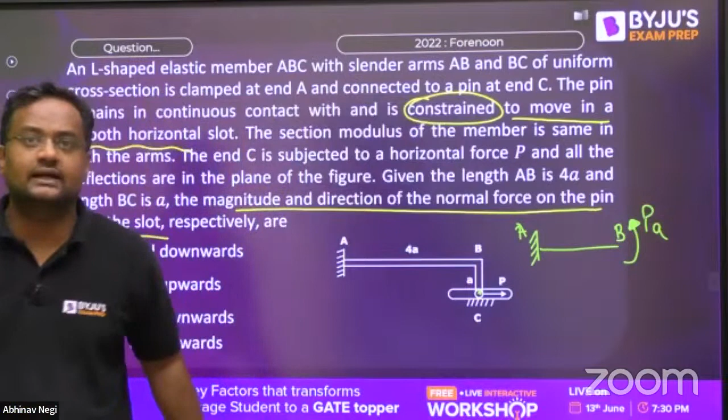Here the moment will be PA. If we see the free body diagram of AB, the P will be applying a moment, PA. Now guys, 100% a downward force will be coming. Why? Because C can move only in horizontal, that means the length is not changing, that means point B is fixed. If I see the first order analysis, this B point will not be moving. The net deflection of B has to be 0, the net vertical deflection of B has to be 0.

It is pinned, so its vertical deflection cannot be there. And if nothing is mentioned, this CB member is also called axially rigid, meaning its length is not changing. So the net deflection of B is 0. This P into A is putting it upward, and this F will have to put it downward so that net deflection is 0. So both this green delta and blue delta have to be same, and for this blue delta, the F force has to become like this.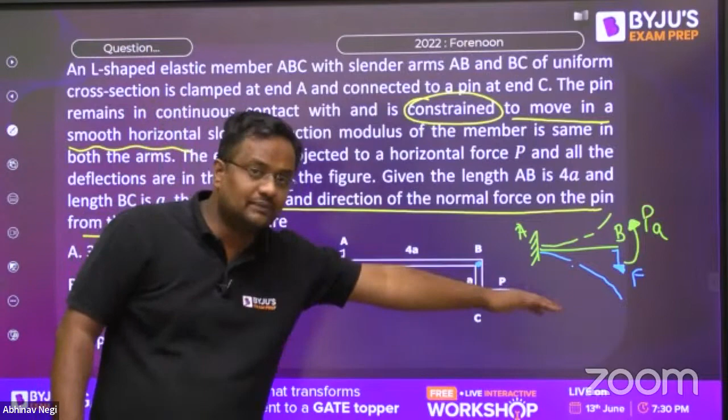So first of all, tell me, have you understood why this vertical force is coming? Because everybody seeing from outside will say for this P load, a horizontal P reaction will come. Why vertical? For a horizontal P load, a horizontal reaction will come. Why is that vertical load coming? Because the net deflection of B has to be 0. Why? Because this point, the green point, this hinge, this pin is not moving anywhere. If this is not moving anywhere, and if this length is constant, so B has to be at the same point. Give me yes or no, everybody.

So now the upward movement of PA is M, P A into 4a square by 2EI, and the downward movement of F is equal to FL cube, F into 4a cube by 3EI. From here guys, what is the value of F? Please tell me in the comment box. What answer did you get? F is coming 3P by 8.

And if you see the free body diagram of this part, this F force will be acting upward because internal is opposite, and from this end it will be downward, so 3P by 8 downward. Didn't understand? Guys, if this is downward force here, so in the pin also it is downward, no? Got the explanation? Got the explanation?

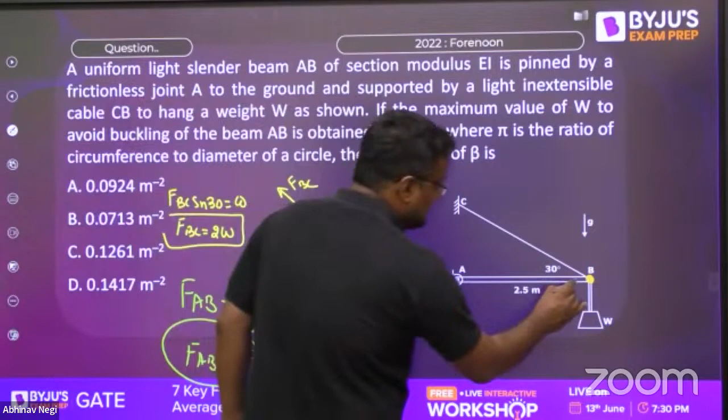So FAB is equal to W root 3, and this FAB is actually the compressive force here. Tell me, FAB is equal to W root 3. Okay, direction I will tell again after this question. First of all, tell me, have you got FAB is W root 3?

Now this compressive force, the column concept will be coming. So PCR is equal to N square, N is 1 here, pi square EI upon L effective square. So what is PCR? PCR is W root 3 is equal to pi square EI. What is L effective? Both sides pin, L square, that is 2.5. So what is the value of beta, the coefficient, that we have to find out? Simplify this, that coefficient will be coming 0.0924. Please check, have you got this, everyone?

Now let us come back to the Anubhav. See, this F is coming downward. In this beam it is fine. If I see this orange part, so F is here downward. So this downward F, which force is transferring this F downward? This one?

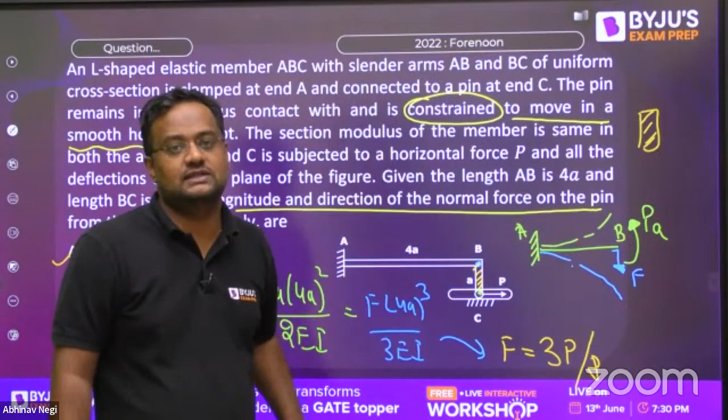This one? Yes or no? This member is attaching there, na? That is only will be providing the F force, nah? Tell me, please. Give me yes or no. Nobody is commenting. Is there any shame or not?

Okay, so internal force equal in magnitude, opposite direction. This is downward, so here it is F upward. This is downward, so here it is upward. For balancing this F, this will be like this. So that is transferring the downward force.

Okay, the magnitude and direction of the normal force on the pin from the slot is downward. This one is coming downward. Have you understood now?

Okay, now yes, this one. This one, guys, tell me fast. Attempt it and give me explanation. Okay, see, I have to go a bit in detail to explain this.

This was asked in 2022 in forenoon. We have to go in a little bit detail. See, this is a section, a cylinder.

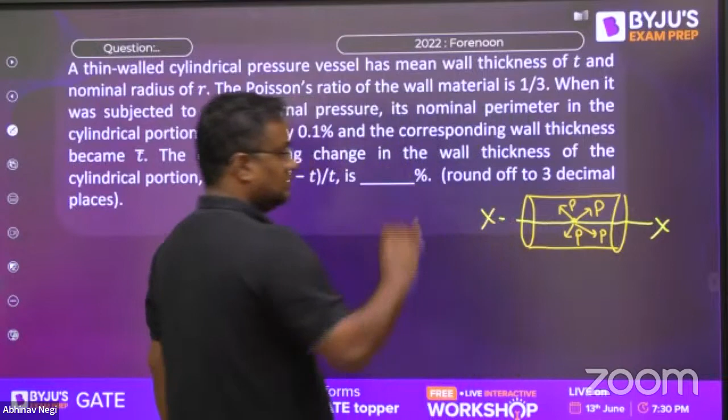And this cylinder is filled with pressure P. Now, after this cylinder, leave this question first of all, understand the concept. Let me cut it here at section XX. Let me see, cut the section XX. After cutting the section XX, it looks something like this.

This thickness is T, and like this. This is the section XX. Now, if I take a very small element here, this one, here hoop stress are coming in this direction.

So hoop stress is causing diameter change. That means circumference, circumference is also diameter, pi d. So hoop stress, and this stress is coming to change its length, sigma L, length change.

And if I consider this one here, the pressure P is acting. Radial pressure, that is decreasing the thickness. Okay, that is decreasing or changing the thickness. So sigma H is responsible for diameter or circumference. This is responsible for change in length, and this is responsible for change in thickness.

If nothing is mentioned, radial pressure is almost zero, negligible. Why? Radial stress is negligible as compared to sigma H and sigma L. The value is very, very less if it is not given, this radial stress.

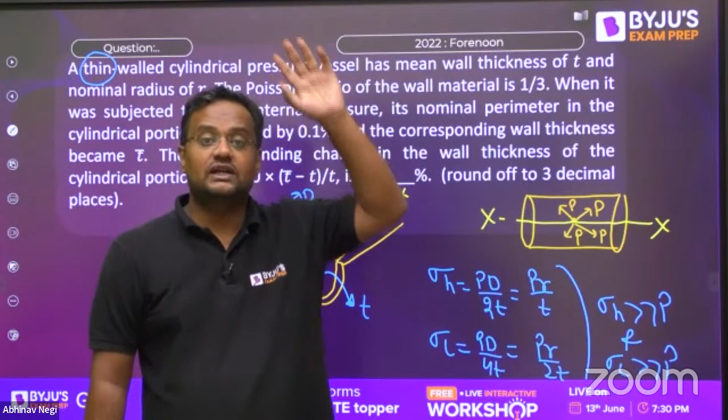The radius by thickness or diameter by thickness ratio is more than 15 and 20. D by T is more than 15 to 20, that means T by D is 1 by 15 to 1 by 20. That means sigma H is very, very big and sigma L is very, very big as compared to P.

Now, guys, here let us come to this question now. Nominal perimeter means diameter. So what is epsilon D or epsilon perimeter? It is sigma H by E minus mu sigma L by E. Okay, radial pressure is taken as 0.

Check this, everyone, this value. That is PR by, if I do it 2TE, if I do it 2T, epsilon D is equal to PR by 2T dividing by 2, multiplying by 2, 2 minus mu is equal to 0.1 by 100. That is given in the question.

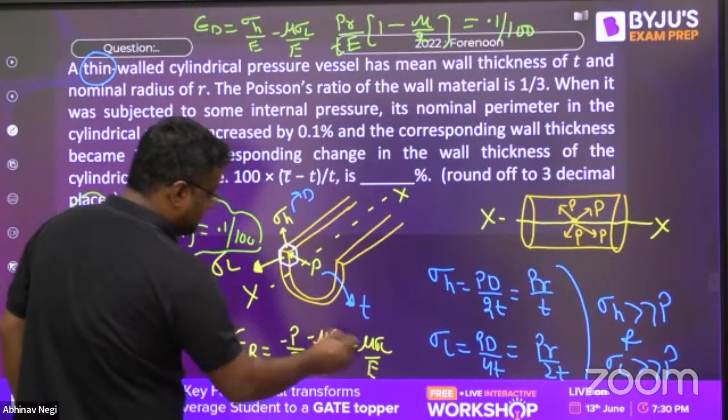Okay, now radial strain, if I want, here this radial stress, now what will be that? So epsilon radial is equal to minus P by E, and here minus mu sigma H by E minus mu sigma L by E. Instead of P, this can be termed as 0. So radial strain here, let me check, everybody just tell me fast, come on.

So this radial stress, this will be 0. Of course, sigma PR will be 0 minus mu sigma H and sigma L. So this is PR by T, and that is PR by 2. PR by T, 1 plus 1 by 2. 1 plus 1 by 2 is 3 by 2. So 1 by E minus 3 by 2. Okay, minus means decreasing, 3 by 2. And here it is PR by T, PR by T, please, mu is also coming.

We have forgotten R. 3R mu upon 2TE. Check, yes. So that is radial, is changing, what I told you concept - that is delta T by T, radial I told na. This is changing the thickness, this is thickness here, come on.

Everything I have figured. So from here, where did it go? From this value is 0.1 by 100. So from here, find the value of PR by 2T. Mu is given na, mu is given 1 by 3.

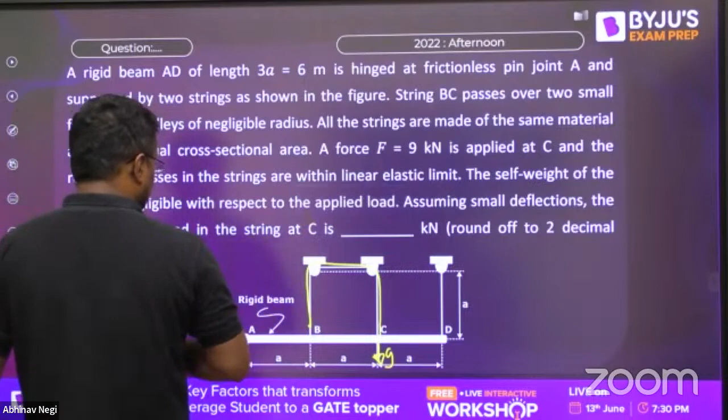So first of all, let me take a bigger new slide. Let me now go to here. Now copy, and now let me do paste here like this. Let me make it a little bigger like this. Okay.

So first of all, these values are 2 meter, na? This is 2 meter, this is 2 meter, this is 2 meter. And at C, how much load is applied? 9 kilonewton, here, this load, this 9 kilonewton. Since they are passing from the same pulley, so tension will be same. Let the tension here be T, and this tension is also T. This may be different because they are independent, maybe T dash.

Okay, now, as this is rigid, so I told you many times, whenever this rigid word is there, it means it cannot bend like this. This is rigid, no joking. This is rigid, so it will be deflected somewhere like this, straight. So if here it is delta 1 and here it is delta 3, then by similar triangles, delta 3 by delta 1 is 3A by A. So delta 3 is equal to 3 delta 1.

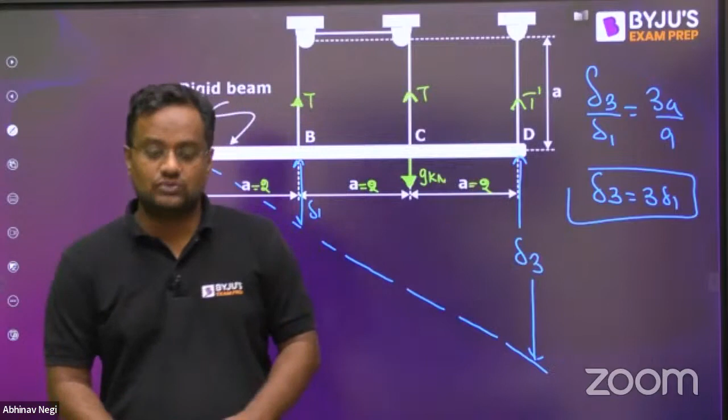First of all, before moving forward, any doubt till here? If I go forward, before that, tell me any doubt? Any doubt till now? No doubt.

So what is delta 3? Why have I not taken delta 3, 1 and 2? Because 1 and 2 will be same, now tensions will not be coming different. I want different equations of T and T dash.

So deflection of 3, this one is T1 into L by AE, 3 delta 1 is equal to T into L by A. Now it has already said that L, A, E are all same. Spring has the same thing. So T1 is equal to 3T. Give me yes or no.

From here, if this is hinge, so summation of moment about A is equal to 0. So if any reaction is passing from here, see this, consider this part now. So here T into A anti-clockwise, that T into 2A anti-clockwise, this 9 into 2A clockwise, and that T dash anti-clockwise. Actually it is not T1, it is T dash.

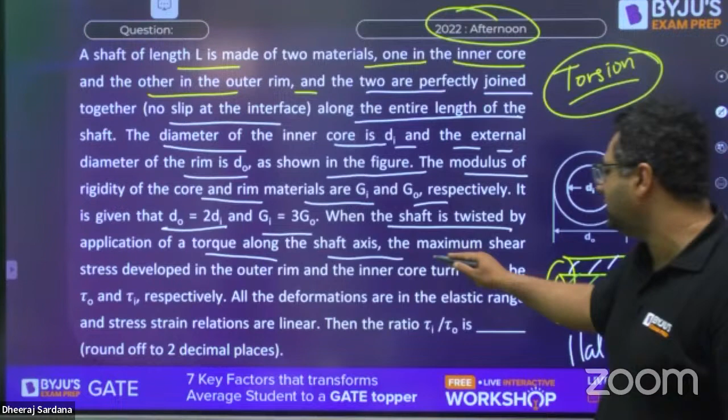The modulus of rigidity of the core and the rim material is gi and g naught, and d naught is 2 times di, gi is 3 times g naught. When the shaft is twisted by application of a torque along the shaft axis, the maximum shear stress developed in the outer rim and the inner core turned out to be tau O and tau I. All deformations are in the elastic range. What is the ratio of tau I by tau naught?

So guys, this is a very good question. I feel everybody will be able to solve this, I am giving you the hint for that. First of all, you tell me when the shafts are in parallel, then the angle of twist will be same or not for both. Tell me that.

Yes, Sachin, good afternoon, you are very late. You are coming at the last question, Sachin.

Okay, tell me, in parallel, does the angle of twist remain same or not? Yes, the same you will be starting with. So you will write theta of inner one equals to theta of outer one. So when you go for this, it is Ti, Li, Gi, Ji equals to To, Lo, Go, Jo. From that you need to find out the ratio of Ti by T naught.

That ratio you will get because you are already given two things. What are those two things? Gi is 3 times Go, d naught is 2 times Di, this is given to you. And you know J is pi by 32, Di to the power 4, and J will be pi by 32.

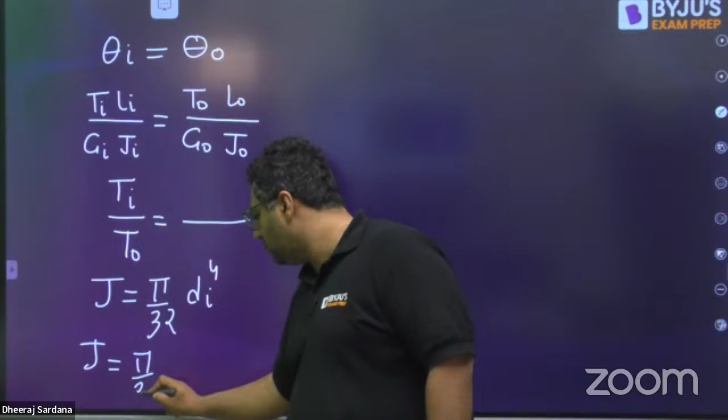D naught to the power 4 minus Di to the power 4. These are the values of J for inner and outer shafts. So you will get the ratio of Ti by T naught when you solve it. Then you need to find tau I by tau O. So I feel everybody is aware that tau by R equals T by J, so you can write tau as TR by J. So you just need to do that.

Ti Ri upon Ji, T naught R naught by J naught. So you already know the ratio of Ti and T naught. You already know Ji and J naught because Di and D naught are known to us. So by solving this, you will get the ratio of tau I by tau naught. That is the question asked. It is a very good question, I feel.

Okay, so guys, if you see this, I am giving you a hint also. When you solve this, the Ti by T naught ratio after solving, you will get it to be 3 by 15. And when you put this in, as I know you are getting tired, so I'm giving you the answer directly. After putting the values, the answer comes out to be 3 by 2. So the answer will be 1.5.